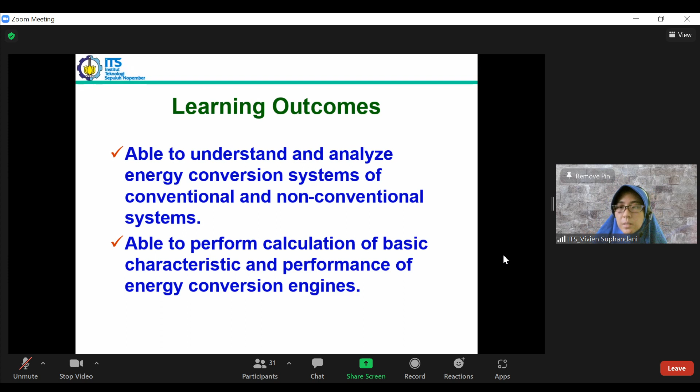So here's what will be covered in this course. We will have an introduction, which is discussed today, and we will talk about conventional systems, which covers what you have learned in thermodynamics. I think you have learned about internal combustion engines before in second thermodynamics, where you learned about gasoline engines, diesel engines, and gas turbine engines.

When you review this, you might relate this system, the process or cycle in this system, by imagining it in, for example, a PT diagram or PV diagram, and the TS diagram. So when you remember this, you also remember the cycle and how the processes work in the cycle.

So this will be covered. You will see that there will be a little bit of overlap between thermodynamics and energy conversion system. We will also talk about external combustion engines, which relates to steam generators, and you have learned about this as well in first and second thermodynamics. So you see here that this is nothing new in terms of the cycle and the processes, you already learned about that.

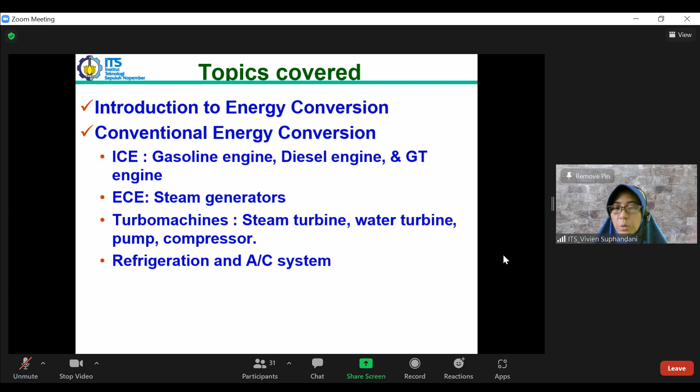We will also talk about non-conventional energy conversion, which relates to renewable energy, more advanced energy systems in which we can talk about water turbines, which also relates to hydro power plants. Now we have micro hydro as well for small scale, small capacity, and also wind turbines, geothermal, solar thermal, and OTEC. Has any one of you heard of OTEC before?

Yes, ma'am. Yes, I did. Yeah, what is that? What does it stand for? Using the surface temperature of seawater for heating the refrigerant. And the refrigerant is for spinning the turbine. Yes, correct. So utilizing the difference of the temperature at different depths in the seawater. Yeah, OTEC.

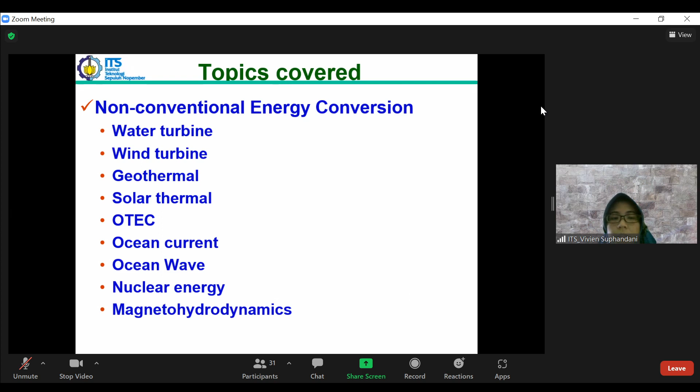All right. So these are the topics. We will have groups for that, and we will discuss that later. All right.

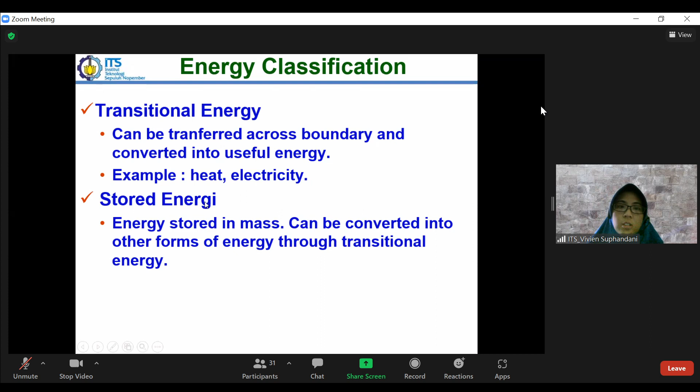Now, before we talk about energy conversion, we have to see that we have a classification of energy. We have the terms transitional energy and stored energy. Stored energy is the energy content of a mass, for example the energy in coal or fuel. But we can also have transitional energy, which is transferred across the boundary or converted into useful energy. Examples are heat and electricity. So this is just a classification of energy.

If we look at the forms of energy, we have internal energy, which I think we have learned about before in thermodynamics. We have chemical energy in terms of chemical substances. We have electromagnetic, nuclear, and mechanical. The most commonly used is mechanical energy, dealing with, for example, rotation of the shaft, or translation of the piston head. So this is dealing with movement.

For energy sources, we have the terms terrestrial and extraterrestrial. Terrestrial is something that comes from the earth, while extraterrestrial is something beyond the earth, in a larger area, outside the earth. So this is just a classification of energy.

When we talk about energy conversion, we learn the system of converting energy. We have several forms of energy, for example mechanical, electrical, chemical, radiant, and thermal. Then we can change the form of the energy, for example from mechanical into thermal, which occurs in friction, or in the reverse direction, thermal to mechanical, in the form of engines and so on.

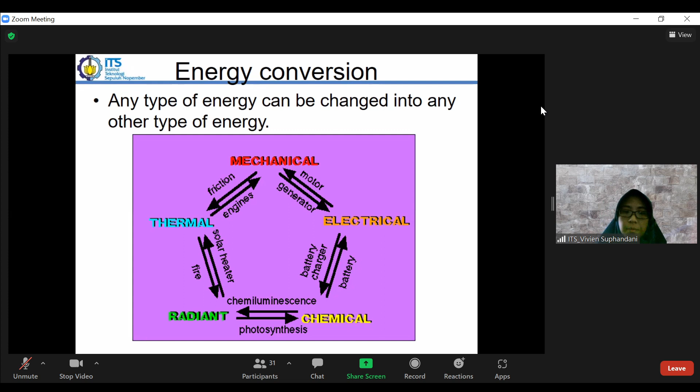So we can transform the energy form, and of course the process has a direction as well. There is something governing the direction of the process, which we have learned in thermodynamics. This relates to entropy, which governs the direction of the process. But with these forms of energy, we can make a system, or arrange and manipulate to change the form of the energy. And this is what we do in the energy conversion system.

If we look at the energy sources, we have non-renewable and renewable. For the non-renewable, or depleted energy, we have terrestrial, something from Earth. Here we have fossil fuels in terms of coal, liquid fuel, or gas. And we also have nuclear, which is also terrestrial.

For renewable or non-depleted energy, we have terrestrial and extraterrestrial. Extraterrestrial is, for example, solar energy, the energy from the radiation of the sun, so solar energy is included in extraterrestrial. What is included in terrestrial is biomass, which is now being developed.

And so this is a fuel which comes from the excess; we can use that from wood chips and so on. We have also biogas, water, wind, and geothermal. So the water itself here can be in the form of hydropower, or in the form of sea or ocean energy, for example, wave, tidal, and ocean thermal.

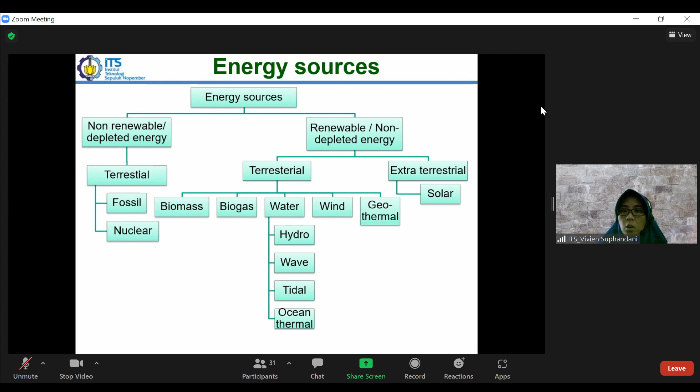So these are examples of the energy sources which we will discuss, and how to convert this useful energy into electricity. So mainly into electricity, or also into torque or power to drive an engine, for example. So when we talk about the engine itself, we have two types of engine. We have the heat engine and we have the cold engine. Heat engine is more related to thermodynamics. Cold engines are more related to fluid mechanics, or turbomachinery.

So here we have heat engine, internal and external, as we have seen before. We will discuss all of that. Internal combustion engine includes gasoline engine, diesel engine, and Wankel engine. While for the external, we have steam turbine or steam engine. Now, anyone heard about the Wankel engine before? Yeah, you've heard about that before. So what is that?

In my understanding, ma'am, the Wankel engine is a gasoline engine, but instead of using pistons, they use a triangular-shaped piston. Yes, correct. So the shape of the combustion chamber is different. It's using a rotary system. So basically it's similar to the piston engine, but the shape is different. So this is called the Wankel engine.

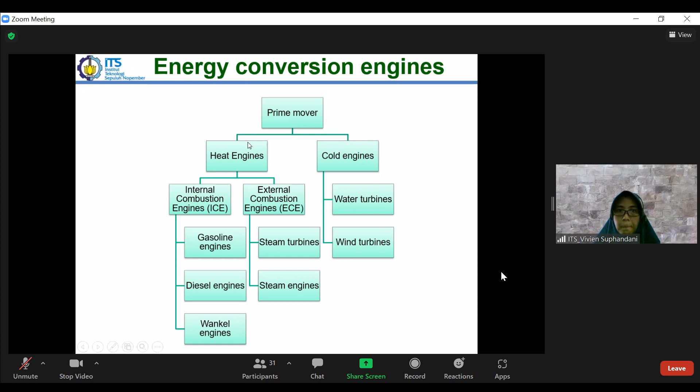So because most of what we've seen here has been learned before, we will do a review. We will use today as a review of what we have learned before, to make sure that we have the same understanding, so that we can continue through this course easily. Okay, so we will have a discussion on this.

Okay, the first one is the first law of thermodynamics. What is that? I think this is very easy. The first law of thermodynamics. Q equal to work plus internal energy. Yeah, delta Q, Q minus work, that will be equal to the internal energy. Yeah, that is correct. So that is the equation.

So you say that this will be, this is not working, wait. All right, so you say Q minus W equals delta U. How can you say that? What is the physical interpretation of that? The first law of thermodynamics, what is the statement? What is the statement?

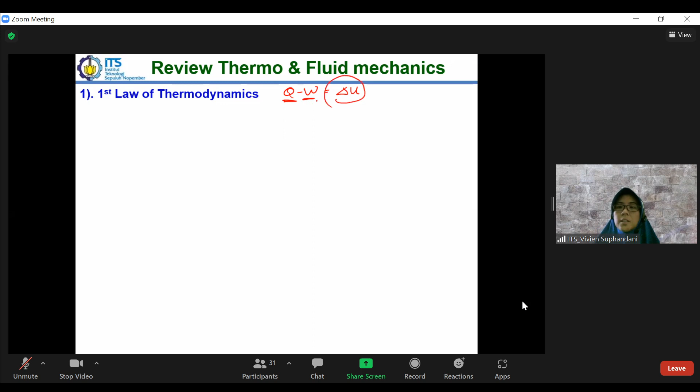If we have a change of energy, delta E, that will be delta EK plus delta EP, the potential energy, plus delta U. So if there is a change of energy in the system, that should be caused by an energy transfer through the system. So this is the first law of thermodynamics, and it is used everywhere in thermodynamics and fluid mechanics. Everything is based on it.

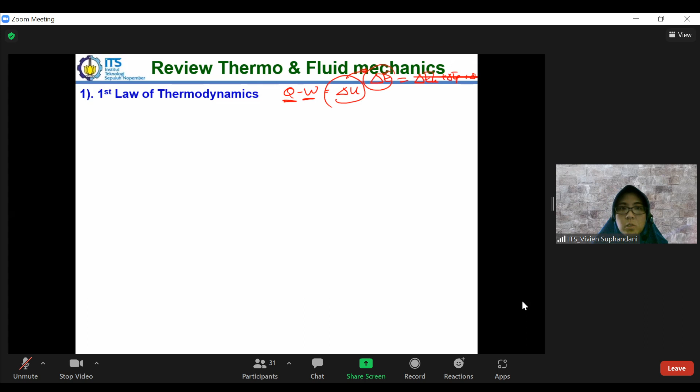All right. The second is the energy equilibrium for the closed system. I think we already had that before. So this is the energy balance for a closed system.

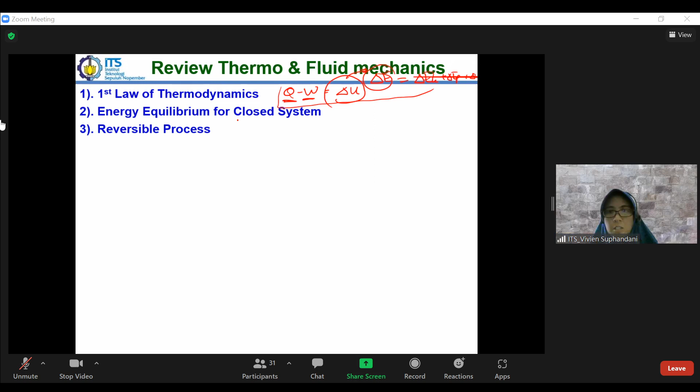Next, reversible process. What is a reversible process? I think a reversible process is when the entropy is equal to 0, ma'am. Correct. Can you say it more accurately? When we talk about a process, we talk about the change from state 1 to the second state. Almost correct. When the change of entropy is equal to 0, because we have the entropy for the first state and for the second state. So it's said to be reversible if there is no increase of entropy in the process.

What is the physical meaning of a reversible process? I think a reversible process is when there is no gesekan. No friction, yes. A reversible process is when there is no friction. Okay, so this is one of the causes of the increase of entropy throughout the process. So that is one example, and it is correct. But what is the physical meaning of reversible?

Reverse means returning back. So a reversible process means that the process can be returned in the same way. It can be performed from 1 to 2 or 2 to 1 using exactly the same steps, exactly the same process. So this is reversible, and the definition of delta S equal to 0 is correct. Now we have the constant volume or constant pressure processes. What do these processes mean?

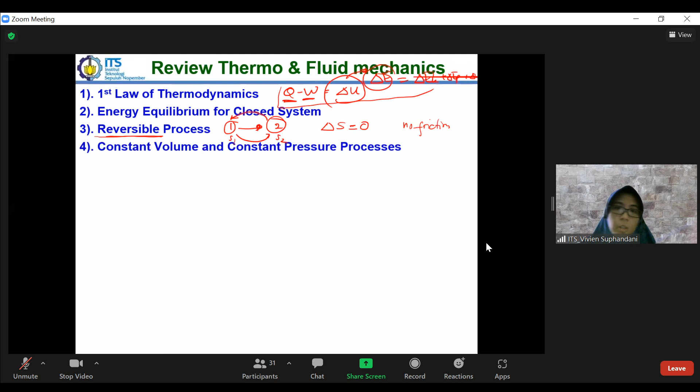Constant volume? Constant volume, when the water is not... tetap, ma'am, waternya tetap. Yeah. So when the volume is constant, or you can say the system that we analyze has a constant volume. Yeah, so constant volume, that is correct. And we can draw that in a PV diagram.

So if we have a PV diagram like this one, the constant volume process will be shown with what line? Vertical line, ma'am. Yeah, correct. So that will be a vertical line. So this will be the constant volume. What is the other name for constant volume process? Isochoric, ma'am. Isochoric, yes, that is correct. Isochoric process. What about constant pressure?

Horizontal line, and there is work there. Yeah, right. So when we have a constant pressure, that means we have the horizontal line. And what would you say after that? In the isobaric process, there is work in that process because the volume is different. Oh yeah, okay. So that is work.

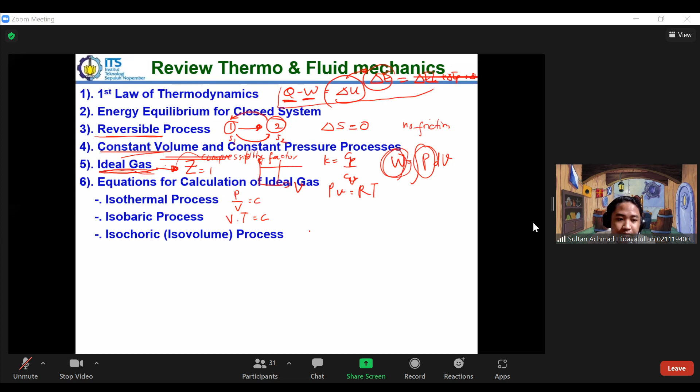Isochoric. Isochoric, P over T equal to constant. P over T is constant. Yeah. All right. So we will just look at that; later we will discuss it. Adiabatic process, or constant heat capacity.

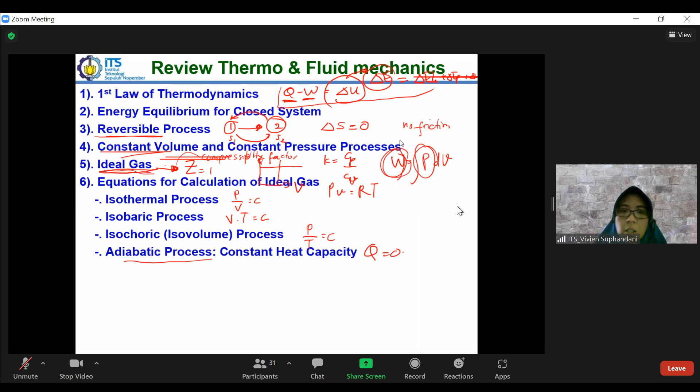Q equal to 0, ma'am. Yeah, for the adiabatic process, correct, we have Q equal to 0. Of course, adiabatic process, Q is equal to 0. But we can apply these processes to the calculation of ideal gas, so this will be a task for you to look at again in the thermodynamics book for the ideal gas calculation.

The basic equation is this one, so we can apply the processes here to obtain the calculation. We will look at that again in brief later. And we also have the polytropic process. Now what is this polytropic process?

Yeah, can you remember what is a polytropic process? P times V to the n equals constant. PV^n equals constant. Yeah, so this is the definition of a polytropic process. So it will follow this equation.

Now we will see, is this correct? P over V is C. It is P over V. No, ma'am, it's not correct. Yeah, so what is the correct one? P times V. Yeah, so that should be P times V equals constant. And this one? V over T. V over T, constant. Okay. All right. Now this one is correct, yeah?

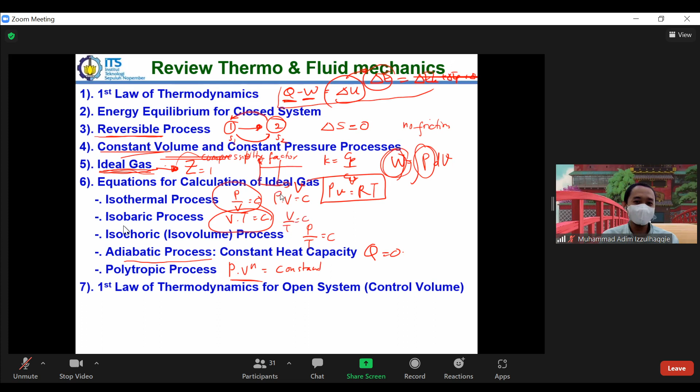All right. So next we have the first law of thermodynamics for the open system. This one is for the closed system, and now we have the open system. So how do we write down the first law of thermodynamics for the open system? When we talk about an open system, there will be a change in time, because we talk about mass flow rate. What is the first law of thermodynamics for an open system?

Q dot minus W dot equals d/dt integral rho dV.

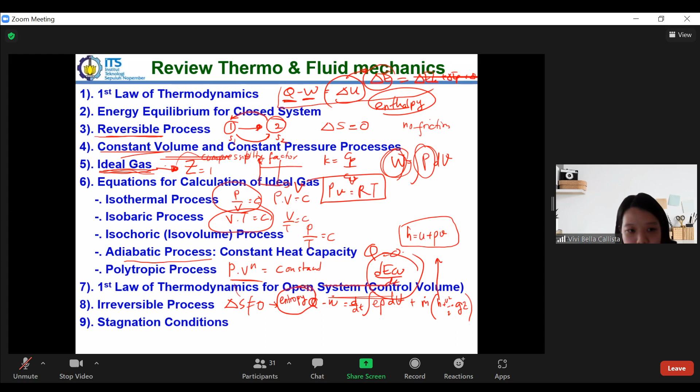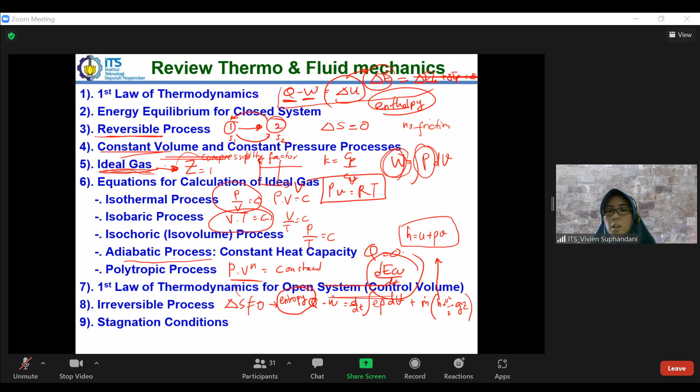Maybe entropy is the measure of randomness or disorder, ma'am. Okay, correct. This is a measure of randomness or disorder. It means that entropy is an energy as well, but we cannot use that energy. So when we have an increase of entropy, the useful energy will be decreasing. It means we have losses in there. Okay, so that is correct.

Last, we have the stagnation condition. So what is the stagnation condition? Still remember the stagnation point? We have the stagnation point in fluid mechanics. What is the stagnation condition? Where the velocity equals 0, ma'am. Okay, correct. So velocity equals 0. Any other? Is that all? Or is there any requirement aside from velocity 0?

Is that complete already? Stagnation condition, the velocity is zero. Everybody agree with that? Or do we need to define more?

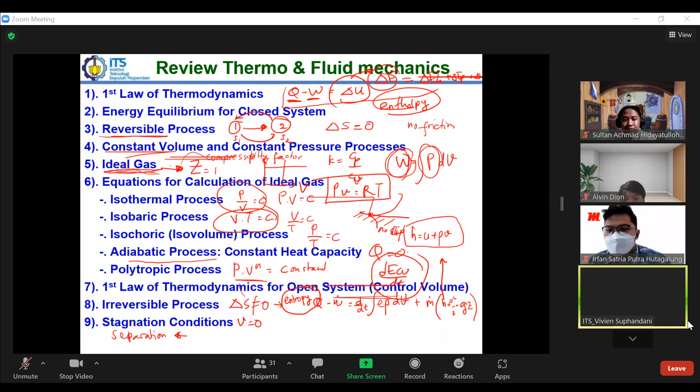Your voice, ma'am. Yeah, sorry. Yeah, it looks like very challenging today.

All right, go back to our discussion about stagnation point. So what is the difference between stagnation and separation? I think it's very different. So what is the definition of stagnation?

No sound? Oh, excuse me, ma'am, excuse me. Can you hear me? Yes, ma'am. Okay, sorry, ma'am.

About the stagnation point, in my mind, stagnation is like when the flow at the point is brought to zero velocity in isentropic condition. Yeah, so that is correct. So in isentropic condition, it means that there will be no losses, during which the velocity is when the particle of the fluid is stopped. Yeah, so that is correct.

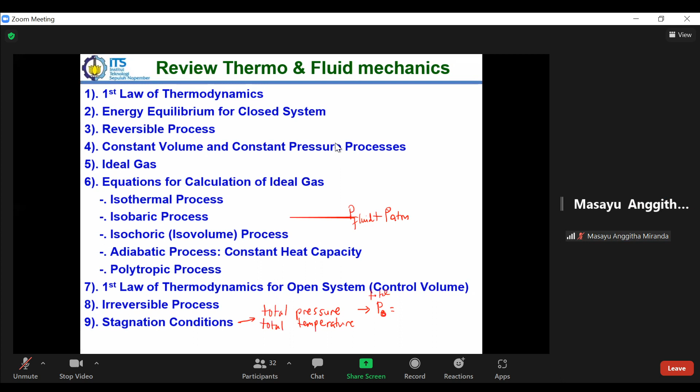What do you think? So Masayu was saying that. How can I call you, Masayu or Anggitha? You can call me Masayu or Mir. Okay, ma'am, I think it is static pressure and dynamic pressure. Okay, yeah, so that is correct. Static pressure plus dynamic pressure.

So what is the dynamic pressure? Rho V squared. Can you repeat, Sultan? 1/2 times density times velocity squared. Yeah, okay, so that is correct. So the total pressure or stagnation pressure is the addition of static pressure and dynamic pressure, so this will be the dynamic pressure.

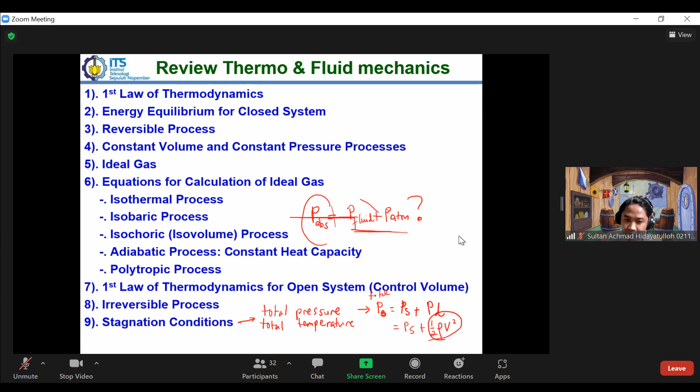So another question: what is this? The one that is answered by Masayu, or Mir. What is this? Absolute pressure, maybe. So this will be the absolute pressure. That is correct. So this is absolute pressure, and this one, when we talk about this, will be gauge pressure. Correct, so this will be the gauge pressure.

Now the question is, when we have this one... what is the pressure that is used in thermodynamic state? When we have thermodynamic state, we have to find the properties. Usually we need two properties to define the state, or the condition. So which pressure is used to find that in the thermodynamic state? Absolute pressure. Yeah, so that is correct, that will be absolute pressure.

Now the question is, which one? Is it the total pressure or the static pressure? Which one?

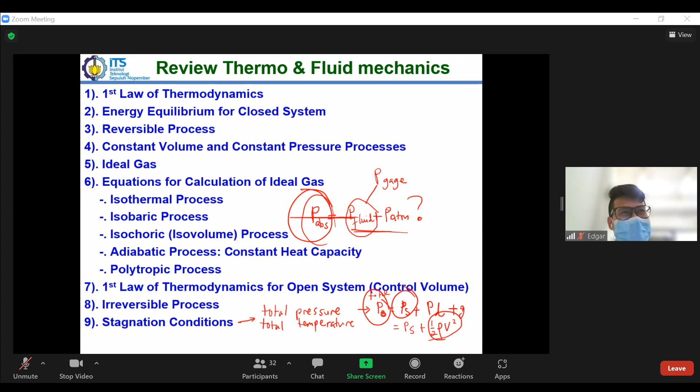So this is already correct. When we talk about head, that is correct, because head includes gravitational energy, since head means the total energy. But when we talk about pressure, that will be composed of static and dynamic pressure.

When we talk about processes, we will go back to using the PV and TV diagrams in the analysis. This is just to remind you what you have learned in thermodynamics.

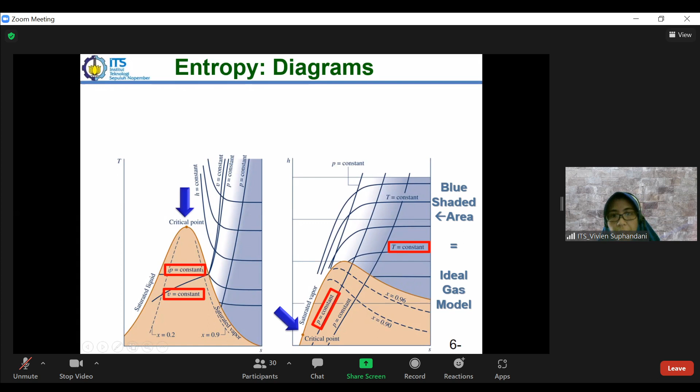This is quite similar to the TV diagram, but the shape of the dome is slightly different, and here we have S as the abscissa. I think you already learned about this as well. We also have the enthalpy-entropy, called the Mollier diagram, and the PH diagram, the pressure-enthalpy diagram, particularly used when we talk about refrigeration systems.

This is the critical point. Remember what the critical point is? It's the point where the phase will be changed, from liquid into vapor, like a critical temperature. At the critical point, we have critical temperature and critical pressure as well.

What is the critical point? When we have a phase change, at this point and beyond, it means we will not have a phase change between liquid and vapor. Beyond this point, above it, we don't have a phase change, so the phase will remain the same.

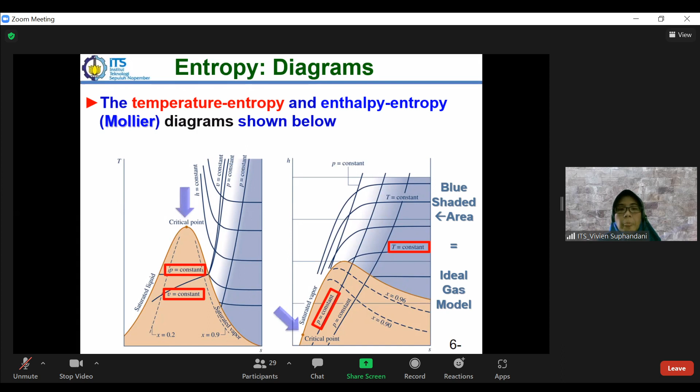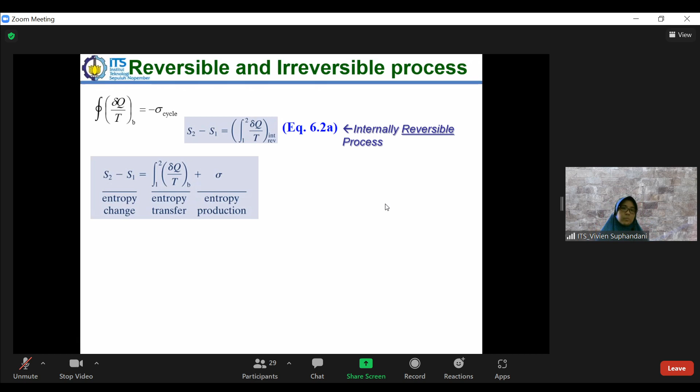This is just a review of what we have learned in thermodynamics. And about the polytropic process that we have discussed before, that is correct.

The polytropic process means we have the correlation P times V to the power of N equals constant. Looking at isobaric, isochoric, or isothermal processes for an ideal gas, when N is 0, that gives P constant, which is isobaric.

When N approaches infinity, this means the volume becomes more dominant compared to pressure, so the volume equals constant, giving an isometric or isochoric process. For an ideal gas, when N is 1, we have constant temperature, or isothermal process. As discussed before, for isothermal, P times V equals constant.

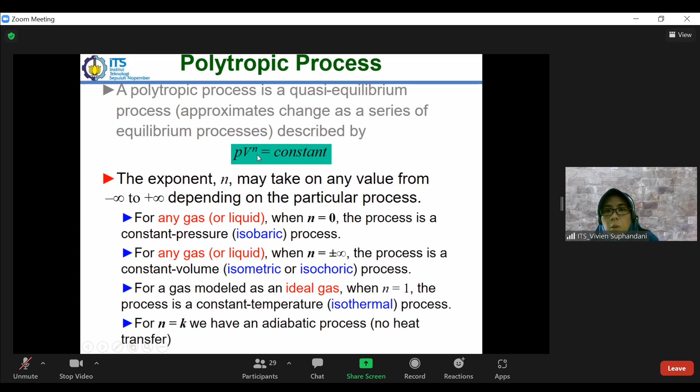And if N equals to K, and N equals K, it means we have a correlation of P V to the power of K that will be equal to a constant. So that means we have an adiabatic process in which there will be no heat transfer, or Q is 0. So if Q is 0, this imposes that N here will be equal to K, or the specific heat ratio of the gas. So this is a review.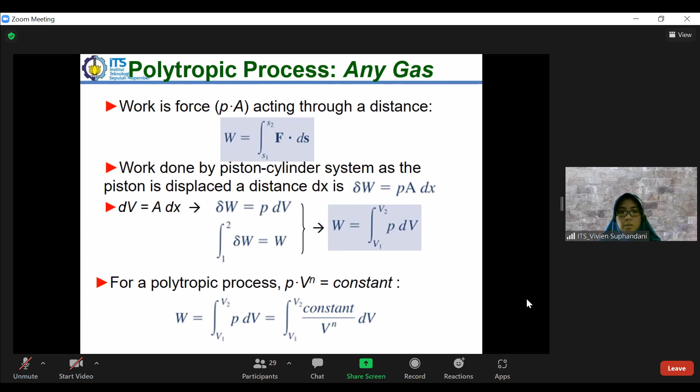Again, dealing with the work done, I think we have discussed that before, in which we can apply the processes into the calculation for the work. So this is just a review of what you have learned before.

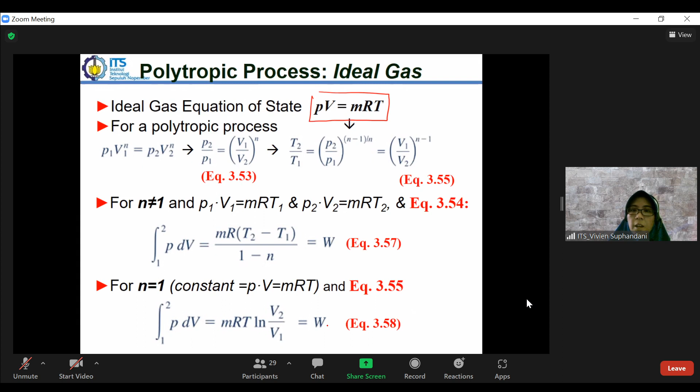And what if we have the ideal gas? So if we have the ideal gas, this is the basic equation of state for the ideal gas, so that we can change that if we have the polytropic process. So if we have a polytropic process as this one, we can find the work for each of the processes there.

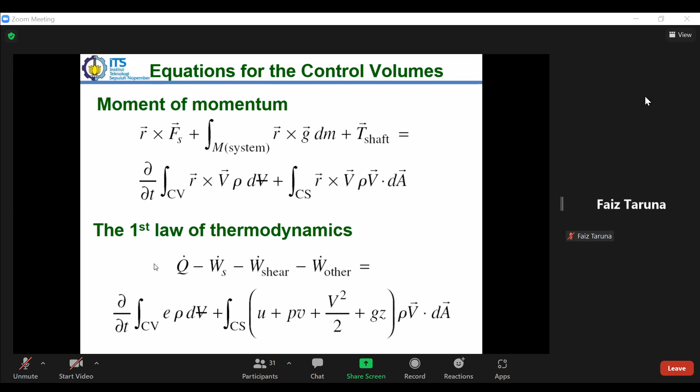Geothermal is taken from the earth as well, from the inner part of the earth, utilizing the heat from the earth. What do you think of geothermal? Is it renewable or non-renewable?

I think it's renewable, because as long as the earth is alive, the heat from the earth can be used for the power plant. Okay, I think like that, ma'am.

All right, so for geothermal, it's utilizing the heat from the earth. Of course, when we create a well to absorb the steam from the earth, in the term of geothermal, we take the steam out from the core of the earth. That steam is taken, and of course the sources of steam underneath will be depleted, but because we have rainfall and so on, the steam can be regenerated in quite a short time. So usually it's included in renewable sources, because the steam can be regenerated in a relatively short period.

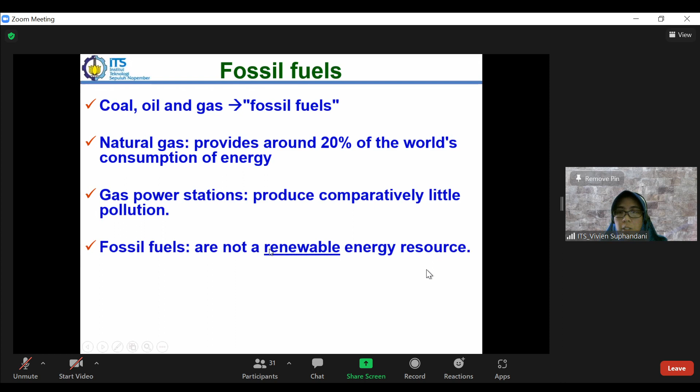So what is included in fossil fuel? We have coal, oil, and gas. Natural gas is about 20% of world consumption of energy. We have gas power stations. So this is just knowledge, and fossil fuels are not renewable energy resources.

So you can see that this is all actually exploitation of the earth. Anything that takes energy from the earth is actually an exploitation, so we have to be very wise in using it.

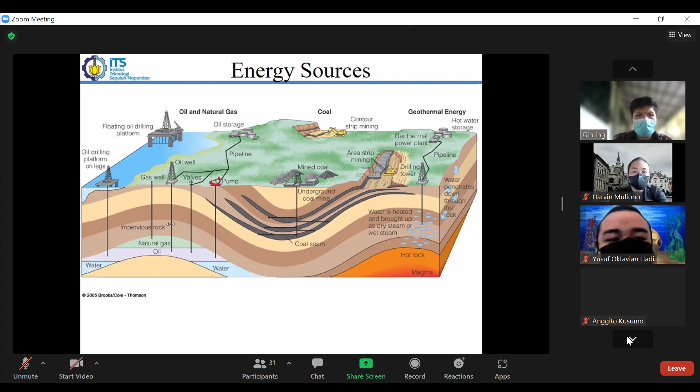So when we talk about steam, remember for example the PV diagram or TV diagram. What is the location of the steam there in the PV or TV diagram? Inside the dome, outside the dome.

So when we talk about steam, if we talk about the area inside the dome, this is a saturated region, in which it will undergo the phase change. So we have the quality of the steam, or the fraction of the steam.

So with this sort of steam well for the geothermal plant, we can have steam which has a quality close to the saturated liquid, or more to the right in the saturated zone, or even in the superheated zone. If we have dry steam, it means we have this area, and when we have wet steam, it has liquid content inside, so this will be different depending on the nature itself.

So in Indonesia, most of the geothermal plants utilize wet steam, which has water content inside. So how is the treatment for that? How is the system built for the geothermal plant? That will depend on what is available here.

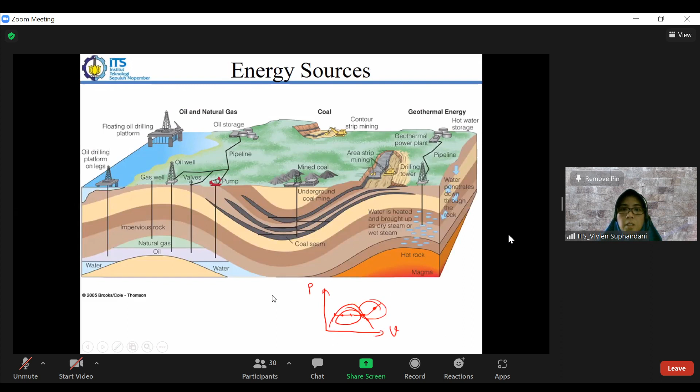And aside from that, this is a mixture of everything that we have learned. We also learned about the two-stroke engine and four-stroke engine. I think you have learned about this as well in thermodynamics, is it? Yes, ma'am. So what is the difference between a two-stroke and a four-stroke engine?

Two-stroke and four-stroke engine. What is the difference? Maybe for the four-stroke, there are four steps: intake, compress, work, and exhaust. But for two-stroke, the intake and compress happen at the same time, and the work and exhaust happen at the same time too. Yeah, so that is correct.

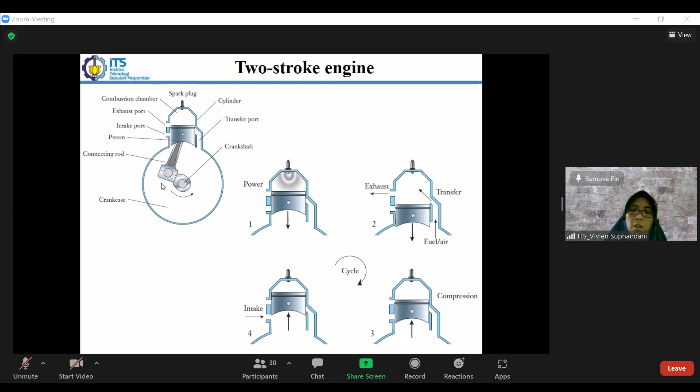While for the four-stroke engine, as was said before, four-stroke means that each stroke is performed for only one process. So if we want to perform the complete cycle, four processes in a cycle, we need two revolutions to get the complete cycle. I think you have learned about this before, and you can imagine what the PV diagram looks like.

What we will learn later in this course is the performance. What is the difference in performance between the two-stroke and the four-stroke engine? One might say that a two-stroke engine will have more acceleration, more torque. Is it correct? What about the temperature? What about the efficiency? That is what we are going to learn in this course. The basic theory is from thermodynamics, but here it is more applied, more on the performance characteristics.

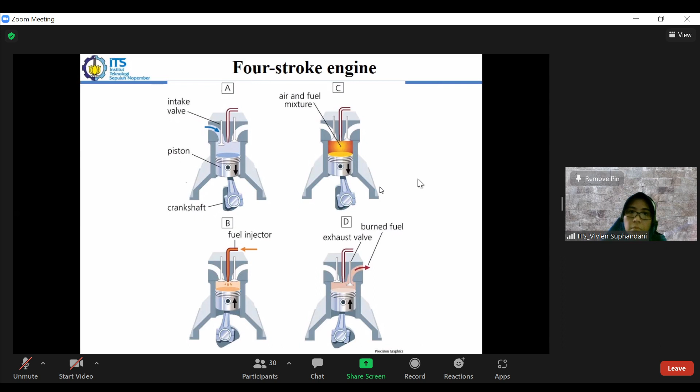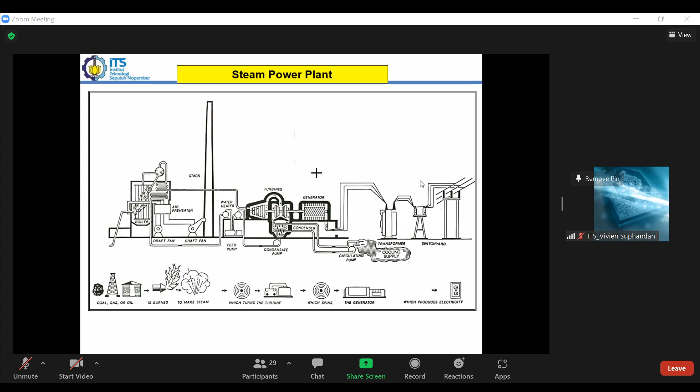We will take a break for a couple of minutes, about 2 minutes. Wait a moment. All right. Okay, so, back again.

Here we have a steam power plant, in which I think we already know the components. We have learned about thermodynamics before. We have 4 main components of the Rankine cycle. What are the components? Boiler, turbine, condenser, and pump. Yeah, correct. So we have a pump here, we have the condenser, we have the turbine, this is the first stage of the turbine, and we have the boiler.

And we have the feed pump here, the boiler feed pump, the water feed pump. So we have a boiler, turbine, condenser, and pump. Those are the 4 main components used in the Rankine cycle. But you have learned as well in thermodynamics that we can have many other components to support that, for example the deaerator, multi-stage turbines, and an economizer as well. That is what we are going to learn as well.

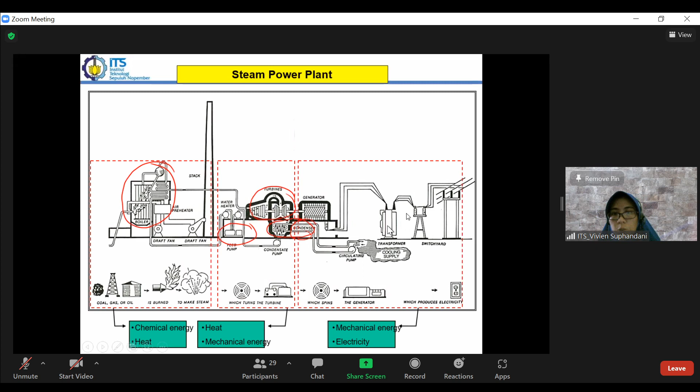And after that, the mechanical side is connected with the generator, so that it becomes electricity. This is then connected to a grid, into a transformer and so on, to supply electricity, for example, to a city or industry. So this is the energy conversion system. We can see there is a change of the form of energy, through heat and also through work.

Usually we have two supplies of air. So the air here is heated before it goes into the boiler. So we have an air preheater here, and then this will be supplied through two ports. Usually we have the primary air and the secondary air. Usually primary will bring in the coal, while the secondary will be supplied to the sides of the boiler here, to ensure that this is burned efficiently.

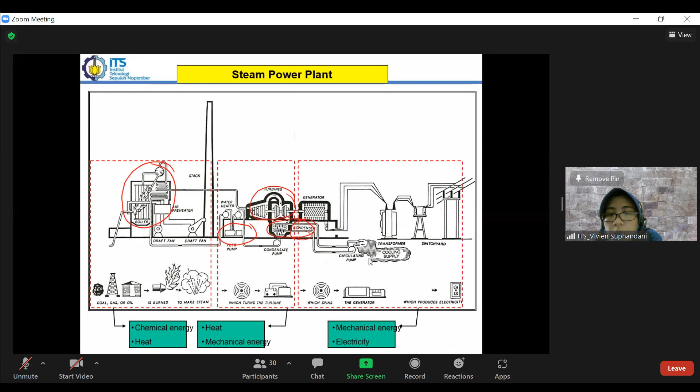And when we look at the condenser as well, this needs to be cooled, so we need cooling water. The cooling water can be taken, for example, from the river, which is an open cycle, or it can also be a closed cycle. Usually if we have a power plant with a cooling tower, that means we have a closed cycle. It means that the cooling water will be recirculated over and over.

So the function of the cooling tower is to cool down the cooling water. Because we know that the cooling water goes in through the condenser, and then it will receive heat from the steam, so here the temperature is increasing. What happens in the cooling tower is that we give a mechanism to cool down the cooling water, and when the temperature is dropped, we can recirculate it back into the condenser. So this is a closed cycle cooling system. All right, so in general, this will look like this, although more complex in reality.

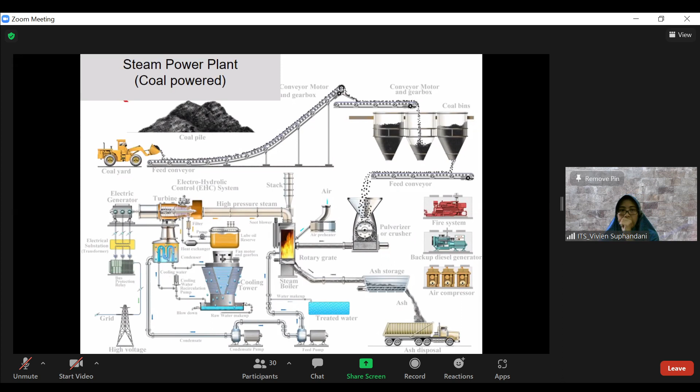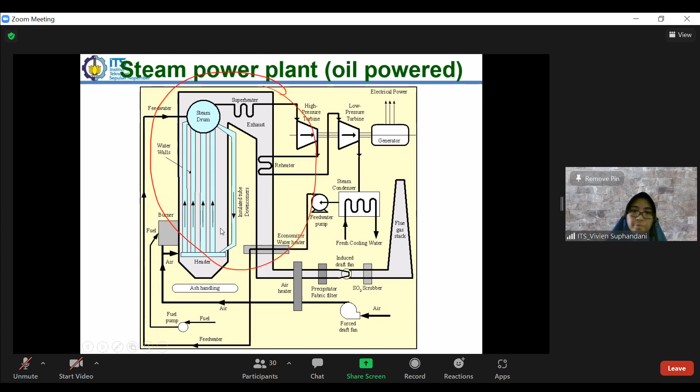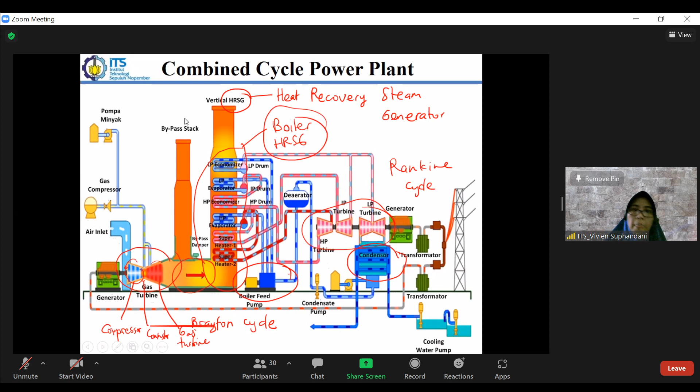So using the exhaust gas of the GT, the gas turbine, because it's still high in temperature. So we utilize the exhaust gas here in the evaporator and so on. The rest will be the same. It will go into the Rankine cycle here. So we have the turbine, which can be several stages. We have the condenser, we have the boiler feed pump, and this becomes the boiler, which is called HRSG itself. So 4 components, similar to before. Okay, so this is for combined cycle power plant. We will learn later about that as well.

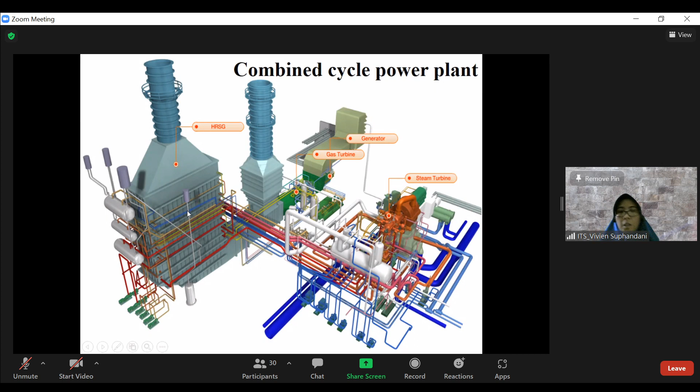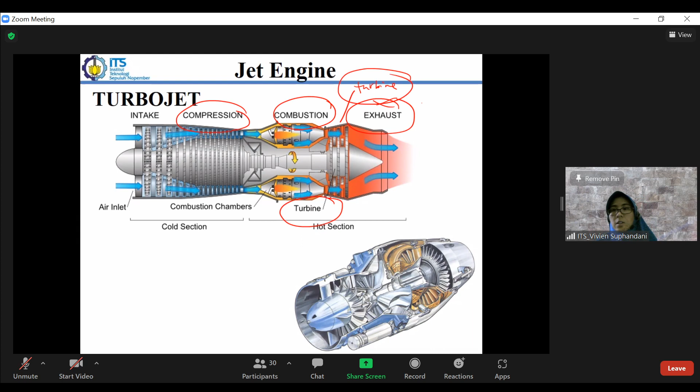And about gas turbine, I think you have learned this as well before in the second thermodynamics. We have 3 main components: compressor, combustor, and turbine here. Sorry, turbines, not this one. So 3 components. So this is the turbine. This can be used for airplanes, turbojet, turbofan, or also turboshaft or turboprop, and it can also be used for land-based applications. So land-based gas turbine is used for power plants.

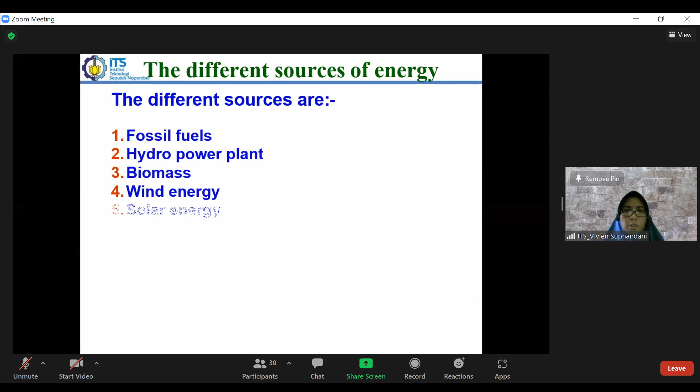All right, so that is in general what we are going to learn this semester. I think this is a different source, so I'll just skip that. We have discussed a bit on that. Now, this is the world sources and uses of energy. So we see here that for sources of energy, oil is about 35% of the availability of the energy. Coal 23.5%, natural gas, combustible biomass and waste, nuclear, hydroelectricity, and this is the other form of renewable energy, so quite small.

And this is the uses of energy. So domestic, commercial, and other 27%, industry 22%, power or heat generation 20%, transportation about 20%, and energy industry use 10%, and the others. So this is just as knowledge for you.

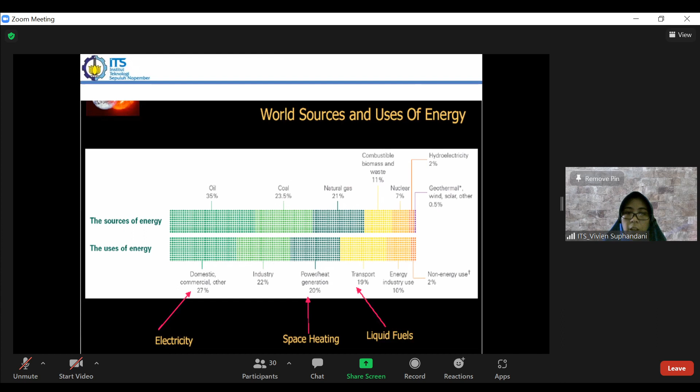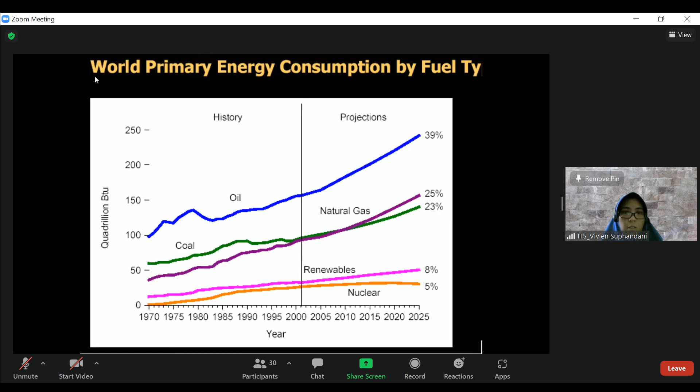And this is the world energy consumption. So it's going to increase more and more. Yeah, more and more. All right, so this is the projection. All right, so I think that will be for the introduction to this course. And for non-conventional, here we have hydroelectric.

Now, particularly in Indonesia, this is very important. We have many resources for water, and the landmark is very suitable for this. Now we will see the performance as well. We will learn about the performance and how to utilize the energy here. So this is in the form of potential energy, potential and kinetic energy.

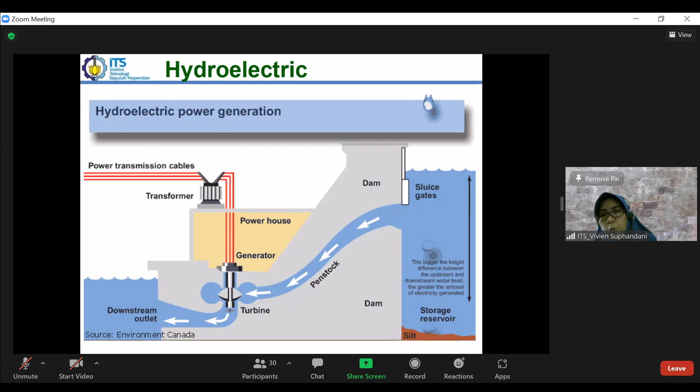So actually for hydroelectric, there can be two. We can utilize high head or high potential, or we can also utilize high flow rate, or high capacity, such as in the river. So if you look at now in the river, there are many turbines, micro hydro turbines that are developed to utilize a very small head, but large capacity or large debit.

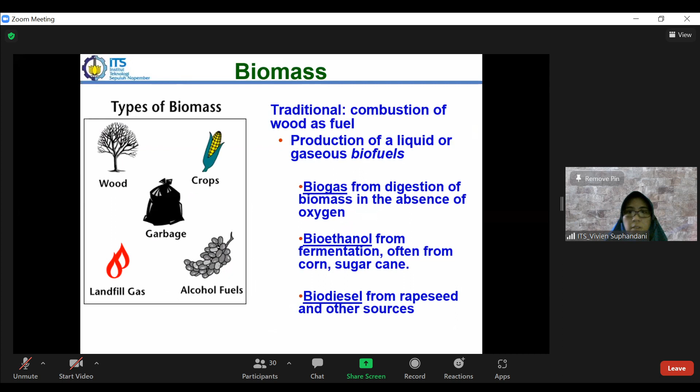Also biomass, so this is being developed as well. This is to substitute the need for the fossil fuel. We can use biogas, bioethanol, biodiesel, or from wood chips and so on. Wind energy, this is being developed as well. And this is what you are going to present later. So we will divide that into groups.

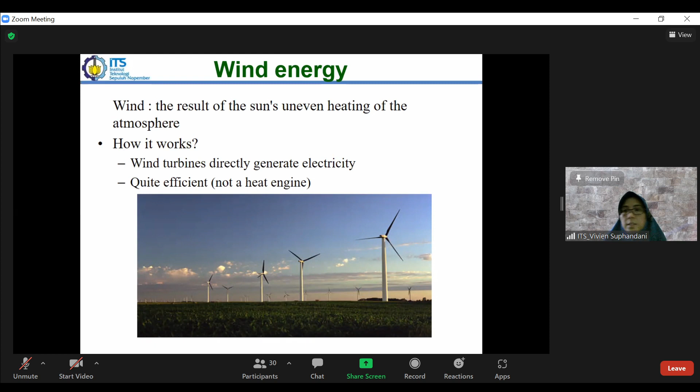So you will describe the principle, the working principle, the performance characteristic, and also what is the pros and cons. What is the advantage and the disadvantages of this. So each group will obtain a topic later.

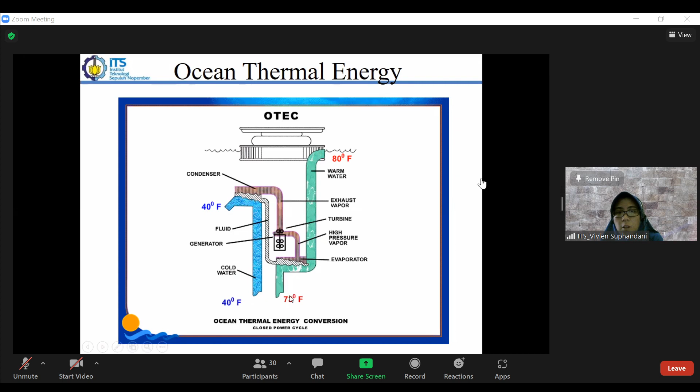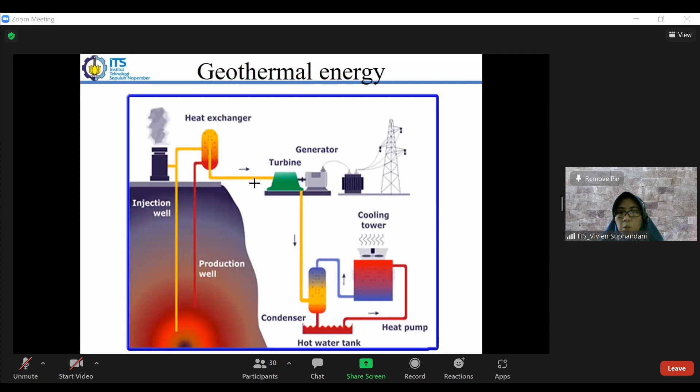And also ocean thermal, another source of energy. This is the example. Different temperature at different level or depth, width as well. And also geothermal. Okay, so I think that is what we are going to discuss. And also nuclear. So this will be the task for you later. I will divide you into groups, 9 groups in total.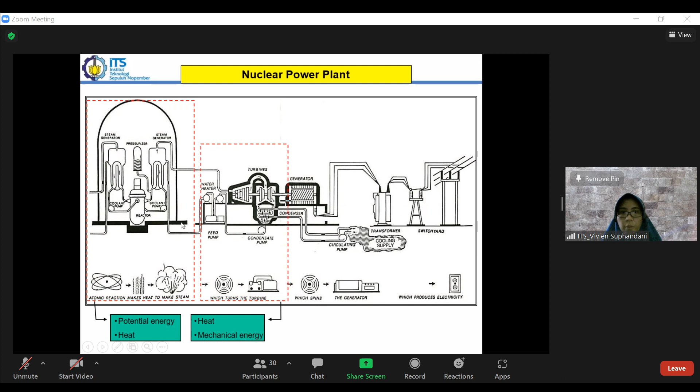And a nuclear plant is actually based on the Rankine cycle as well. So if we look at nuclear, the difference is in the boiler, in the boiler side. This is also utilizing the Rankine cycle. Okay, so I think that is all for today.